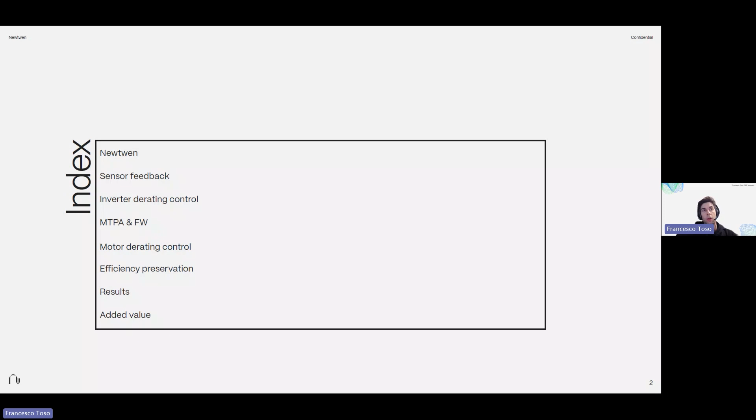So let's start. Newtwen is a software company working at the forefront of physics AI software sensor solutions. We have developed the first engineering platform, named Twin Fabrica, which is meant to create and deploy virtual thermal sensors at scale. Basically, we have integrated a streamlined 6-step unified methodology where you can import your geometry, set your material properties, import your finite element simulation analysis, make multi-physics simulations, and get your ROM, your reduced order model, thanks to the model order reduction libraries integrated in this software.

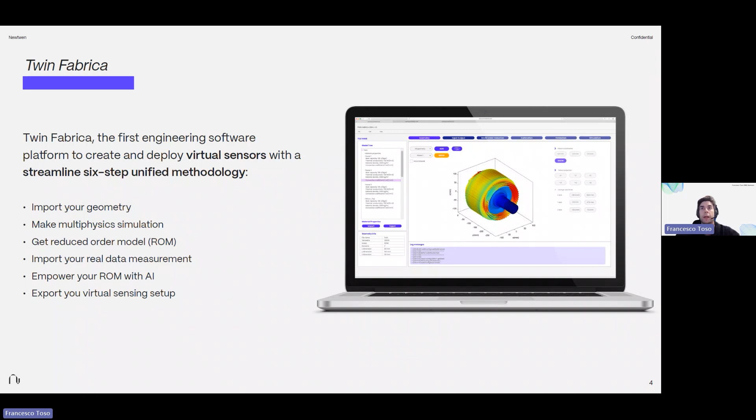You can import your real data coming from the field or from the entire engineering process of your electric motor production, your software, or your traction inverter, etc. And then you can also empower your reduced order model with AI in order to improve the accuracy and the reliability of your system, such that once you are satisfied with your requirements for production, you can export the final firmware to be plug and played inside your software architecture.

As I mentioned, I will not focus today on how to create, deploy, and validate virtual thermal sensors, but more on how to use them and extract value from them. The first comparison that we are going to analyze together is the kind of sensor feedback with respect to the state of the art of hardware.

Today in electric drive applications, when you have to control your electric machine and your traction inverter, you basically have at your disposal two main temperatures. One is the temperature in the stator winding, when you're lucky enough that you can place the sensors, because, for example, if it is not easy or if it jeopardizes the speed of installation in production, this kind of sensor is in some cases placed in the stator iron.

The other main temperature is the one provided by the supplier of the power module that you're integrating in your traction inverter. So you have the temperature near the semiconductor junction, but it's not an accurate state-of-the-art sensor feedback for giving you the right information on the junction temperature.

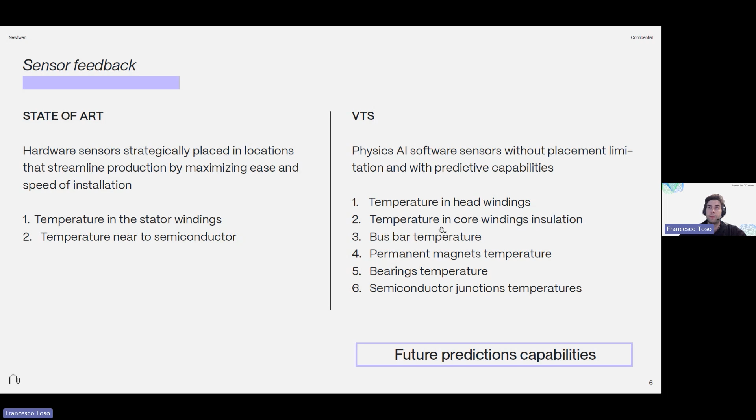The last advanced functionality that you have is the granularity.

So basically, in the state of the art, you have at your disposal a thermocouple or an NTC in the electric machine or traction inverter, which is giving you the information of the temperature in one point. But we know that for high current density applications, the gradient of temperature, of course, is not uniform, and the temperature in a single point is not enough to identify the hotspot.

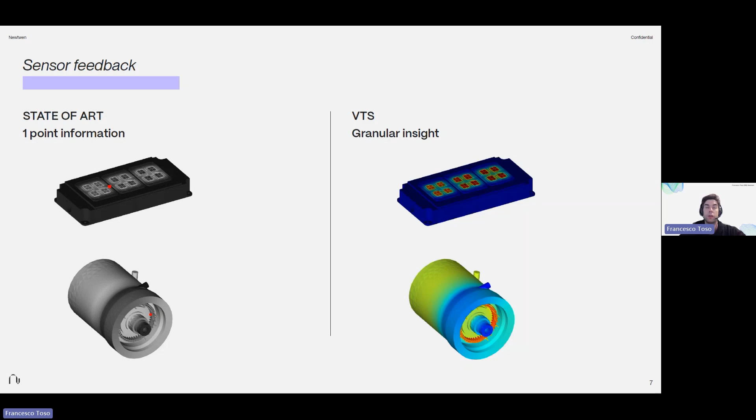So on the contrary, on the right-hand side, we have the virtual thermal sensor functionality, where you can exploit the granular insight information, like having an IR camera running in real time in your microcontroller unit, which is calculating which is the hotspot, the hottest surface in your system, and you can use that kind of information in closed loop control.

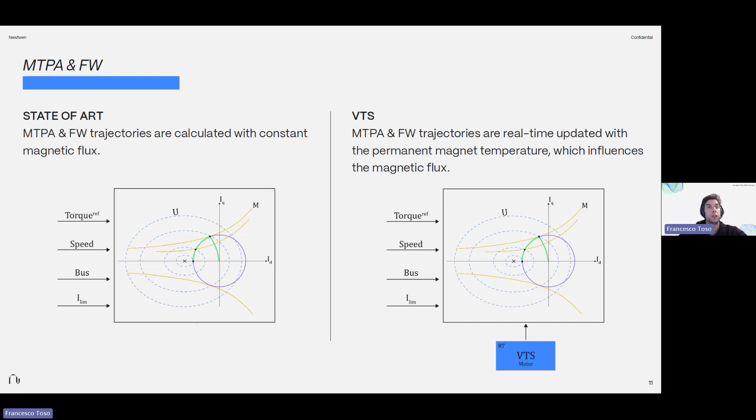So with virtual thermal sensing technology, instead, you can place a specific virtual sensor, a real-time VTS, that is estimating in real time not the hot spot in this case, but the volume average temperature of the permanent magnet. And so you can use this to calculate in real time the dynamic change of the magnetic flux, which can be used to optimize the real trajectory of MTPA and field weakening in your control. What does it mean? It means that you can enhance the efficiency of your electric drives.

So to move on with the third control derating strategy, the one regarding the motor, here we have two main bottlenecks in the electrical machines. One is on the insulation winding.

It's well known that statistically the main cause of fault for electrical machines is the degradation of the insulation winding. So it's a quite critical temperature. You want to be sure that you can monitor the temperature of your insulation winding below a certain level that defines the insulation class of your electrical machine. And so basically to do that, you use a simple PI controller, which is derating the current.

And in the case of the state of the art, since you know that a single point of measurement doesn't match the hotspot in your real system, you're applying a safety margin, in this case of 20 Celsius degrees. So even if the insulation class of the material that you have chosen during the design phase can support staying continuously at 180 Celsius degrees without jeopardizing the lifetime of your electrical machine, here you're applying a 20 Celsius degree safety margin, so you're limiting the temperature measured with your NTC or thermocouple to 160, acting on the derating of the current itself.

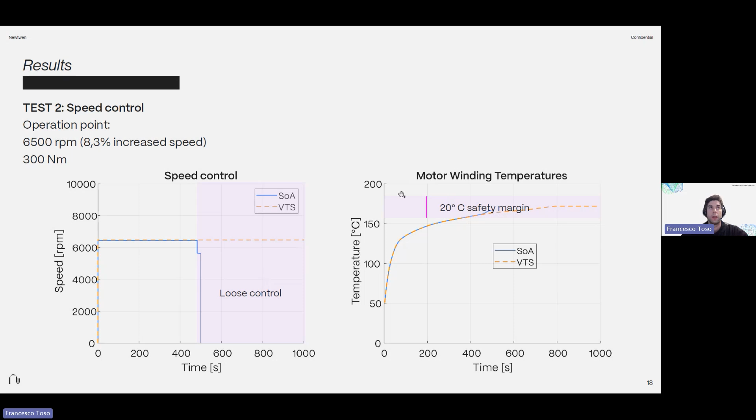So in this case, using VTS control, basically you can hold the speed continuously without any problem with this 300 Newton meter. And that was the effect on the motor winding temperature if you reduce this 20 Celsius degree safety margin. Now, let's focus more on the peak torque duration test.

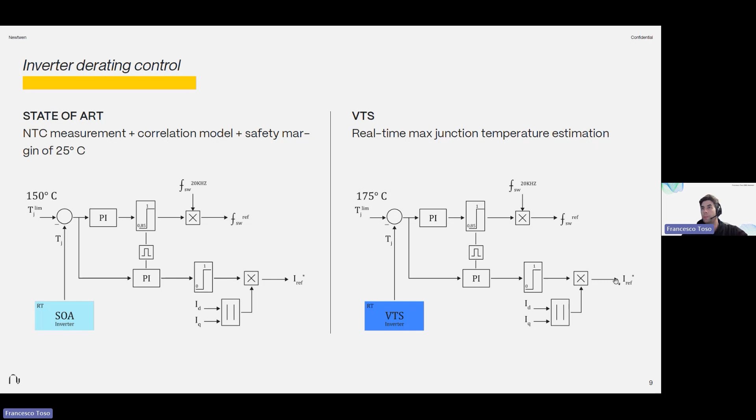So in this case, that 25 Celsius degree of safety margin really is compromising the performance of the peak torque duration, because without that, lowering that, you can have a 5-time increase of this peak torque duration. And it is quite an important KPI for acceleration performance, mostly for applications like motorsport.

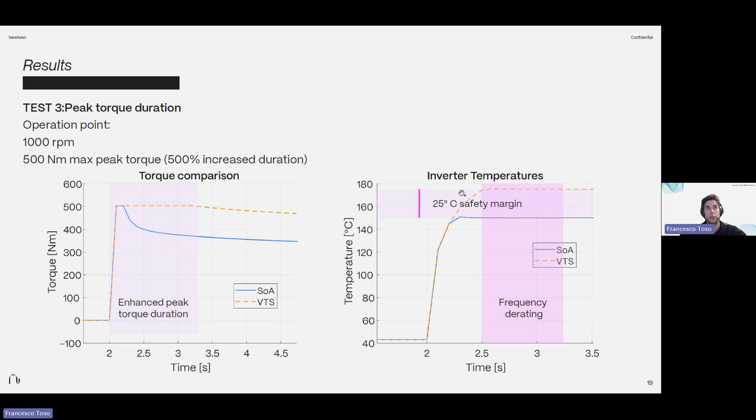And then once we reach the 180 in the motor winding temperature, of course, there will be the second control loop that is acting on the current, and so it's limiting the torque, basically, because current and torque are proportional one to each other, until you reach the steady state. So you can control safely to 180 and 175 the motor winding and the die of the junction of the inverter. Here we can see a clear effect in the max torque and also in the nominal torque.

And this second one, the 16%, when everything is steady state, you don't have variation on temperature because it is controlled to its limit of 180 in the insulation. You don't have variation on the torque, you don't have variation of the speed, so everything is in steady state. In this case, we have an increase of 16% in the nominal torque. So this is true, but it's true for this operating point. It's not true for the entire operating speed range of the system.

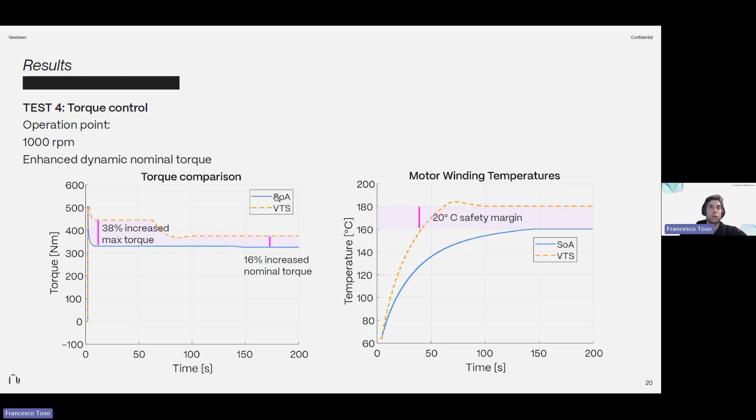That will be explored and analyzed in a moment. We will see together a full simulation exploring the full range of speed, such that we can appreciate the two areas defined by the torque with the state-of-the-art or with virtual thermal sensing technology.

Before that, we have the last test done here that was quite important to highlight how important it is to monitor the temperature in the magnet. So basically in the on-off application where you don't have a priori information on the mission profile, you don't have mission profiles that are already determined, so you don't know basically anything about the thermal behavior of the rotor. You don't know, when you turn on your system again, what will be the rotor temperature, so the magnet temperature. It's fundamental to have a virtual thermal sensor there that you can use in order to control if you want to avoid the demagnetization.

Here it is clear how motor magnet temperature and motor winding temperature have different dynamics in this case. So even if your winding temperature has cooled down, it's not said that your magnet temperature has cooled down enough such that you can restart with your operating condition. And this is the case. So without knowing this, your control is completely blind. And even if you're using the safety margin, you can't avoid this irreversible demagnetization. And so you can't avoid the loss of efficiency.

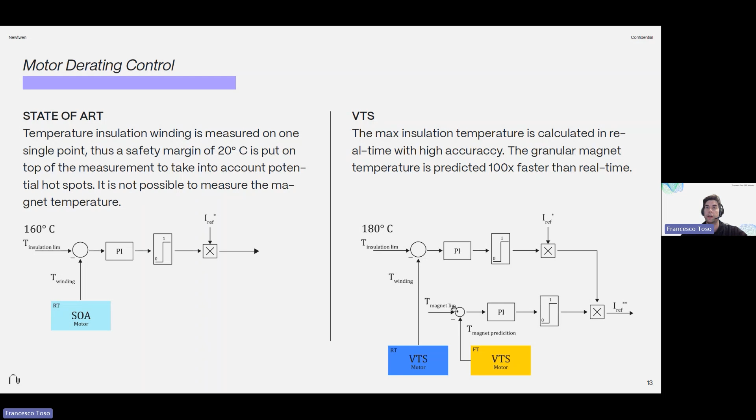Instead, if you use this second control loop, so if you can predict the temperature 100 times faster than real time in your magnet, you have the chance to calculate which will be the current reference such that in steady state you can control the system to a safety limit, in this case the operating limit, if you remember, was 100 Celsius degrees. And this is exactly what is happening here.

After the estimation of the virtual thermal sensor in real time, it's getting closer to 100 Celsius degrees. That control loop is acting and calculating super fast which will be the current level such that in steady state, and here you can see the first transient, you can control the temperature in the magnet below the 100 Celsius degrees.

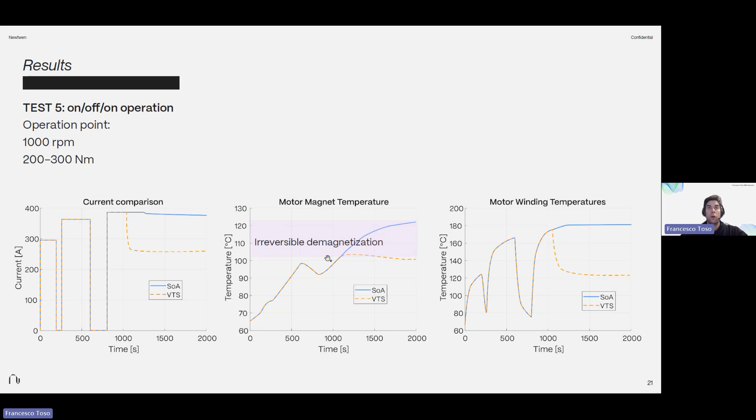So basically, to recap which kind of added value you can enable thanks to the virtual sensing technology, you can basically increase the rated speed of your electric drives.

Of course, these numbers, once again, are calculated on a specific case, on a specific operating condition, and in the best case where we are lowering the safety margin to zero. That's not to say that you have to lower them to zero. Maybe you can lower them by 50% or 60%, and still you can have a very huge margin in the

increased performance. So basically, with the same identical hardware, you can have more performance if you use this kind of control, or with the same performance requirement, if you use this control, you can design cheaper, so a smaller electrical motor, or you can use cheaper, smaller power modules.

So just to recap, you can increase the rated speed of your electric drives. You can extend the peak torque duration. The max torque and nominal torque also can be increased. But most importantly, as I always define, you can increase the state of function. So basically, you can maximize the performance of your system, but in a safe way, without jeopardizing the lifetime, the remaining useful life of your electric motors. And this is done thanks to the fact that you can also control magnet temperature, avoiding the demagnetization effect.

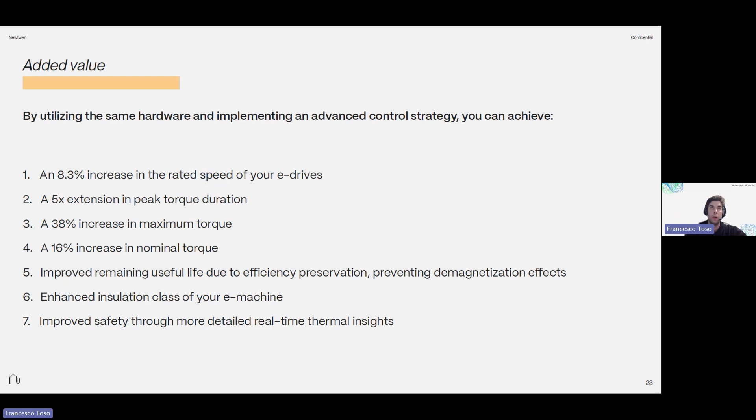So now we can see together, before the Q&A session, a full simulation done on Simulink, which in the meanwhile I also run. So here we have state-of-the-art control and virtual thermal sensor control. We can look inside here. To perform this simulation, we are using two digital twins: one of the electrical motors, where the electromagnetic and thermal behavior is executed in real time, and the other one of the power modules.

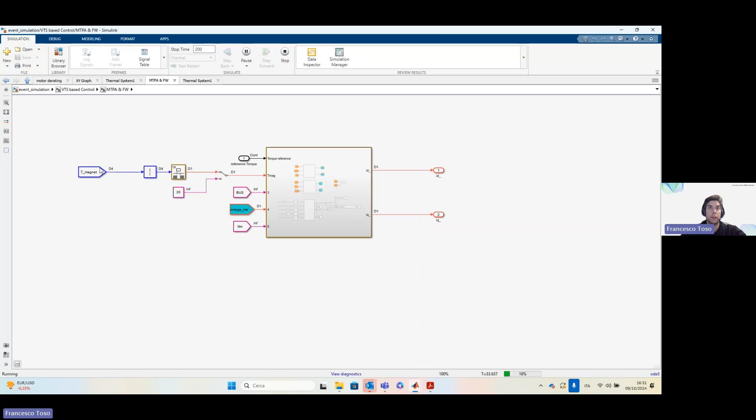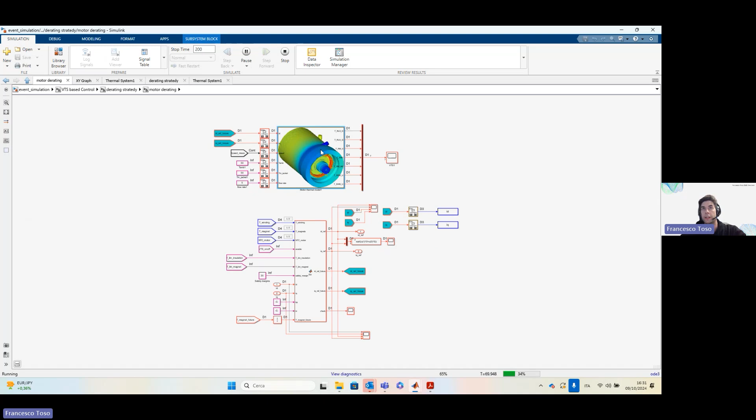And here in these three blocks, you have the MTPA and field weakening trajectories, which in this case are using the volume average magnet temperature of the electric motor. We have the derating strategies. First, acting with the inverter derating, which has a higher priority with respect to the motor derating, and then this reference is fed as input into the motor derating, which in this case is using, as you can see here, a model faster than real time in order to also control the magnet temperature. And here in this block, we have a current control that is following the reference and calculating the duty cycles for the traction inverter.

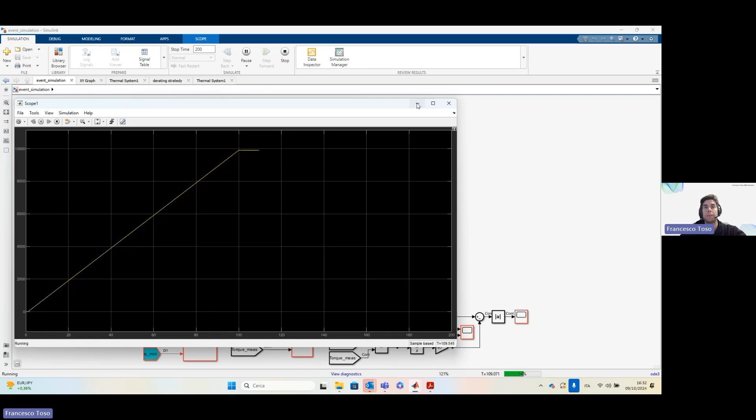Now we can see here we are asking for a certain ramp of speed from 0 to its maximum limit. So now it has just achieved the maximum operational speed limit for the system. And we can see together the two electric drives running in parallel with the same models, but with different control strategy architectures and with different operational limits for the safety margins.

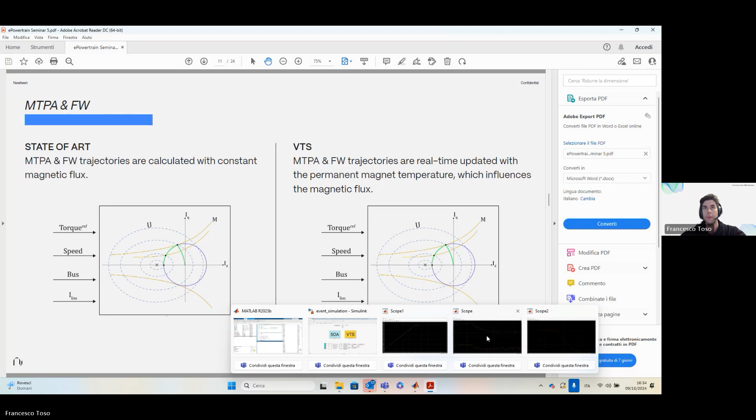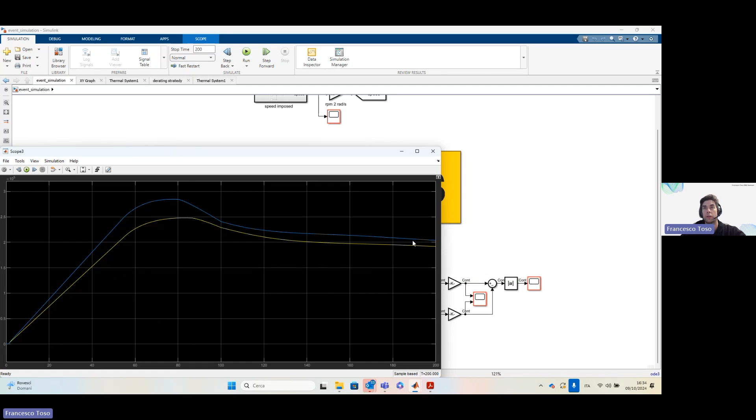And then, of course, here we are in steady state. Here we are on MTPA until more or less 60 seconds, when you have the field weakening, and you can see the area of the orange torque here is much larger than the area of the blue one, which is the state of the art. This can also be seen by multiplying the torque by the speed, so you can see the effect on the power. If you integrate, you also have the energy.

And if you also see the difference, you have how many kWh you can increase using VTS technology with respect to the state of the art in 200 seconds. So regarding the temperatures, let's see if they are all satisfied.

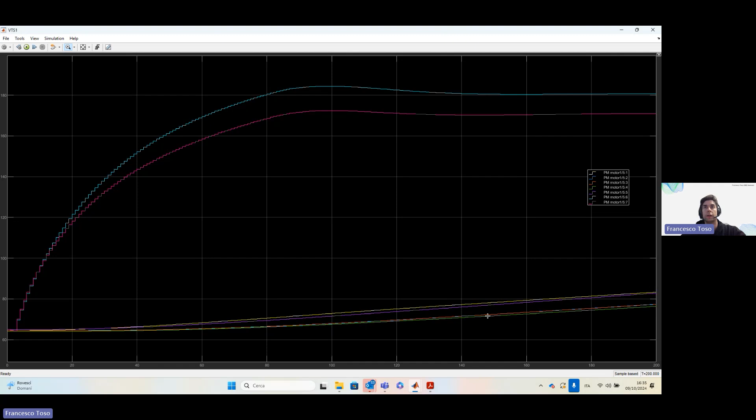So here you can also observe the sensors, the virtual sensors in the end winding and in the rotor temperatures. So basically, here it's clear how you can control the highest winding temperature to 180 Celsius degrees. You can also see the clear effect of the cooling, so inlet and outlet. So basically the pink, the red line here is the end winding where the coolant is entering the machine, as can be observed here.

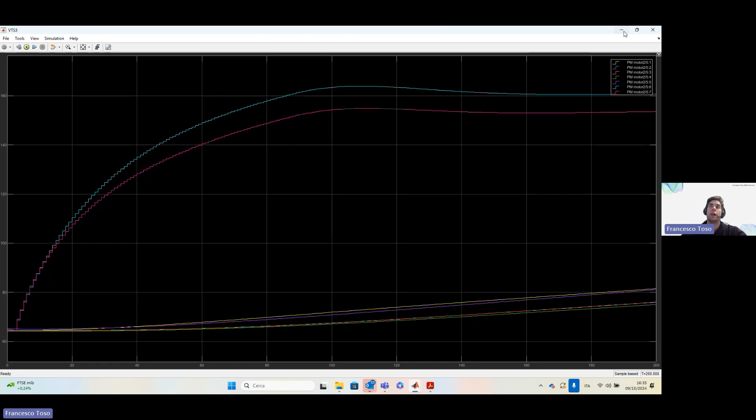We have the same also in the other. But now, as you can observe, the temperature in the winding is controlled to 160 and not anymore to 180. So the safety margins that we have mentioned during the presentation. And then I would like also to see with you which is the effect of the inverter derating.

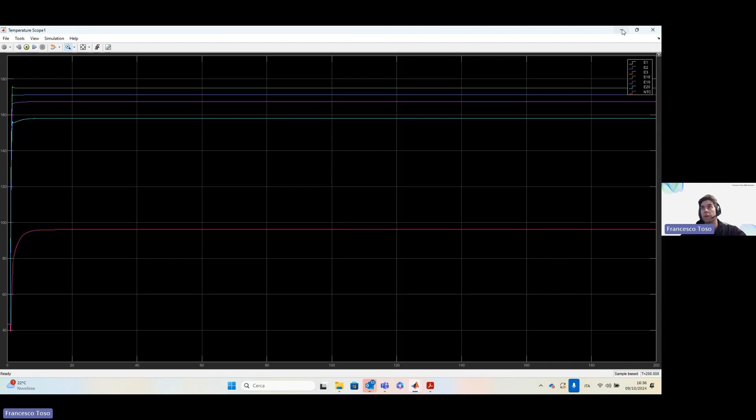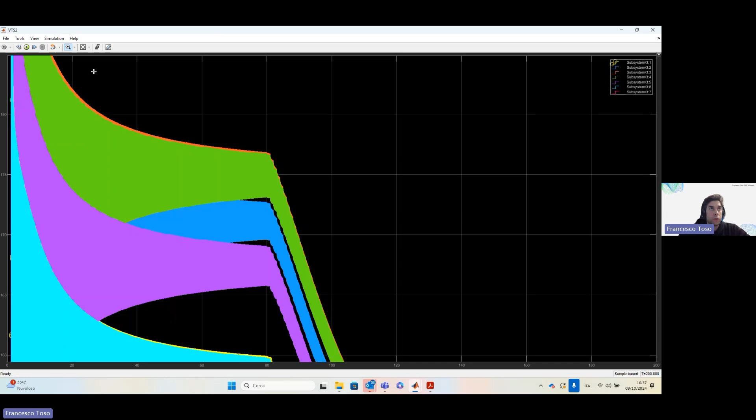This is not the real dynamic of the inverter. It is the main one, the fundamental one. So you don't see the swing on this model, but in the real traction inverter model coming from the digital twin, yes, you can see. So here you can see also the swing effect of the electric period of the current.

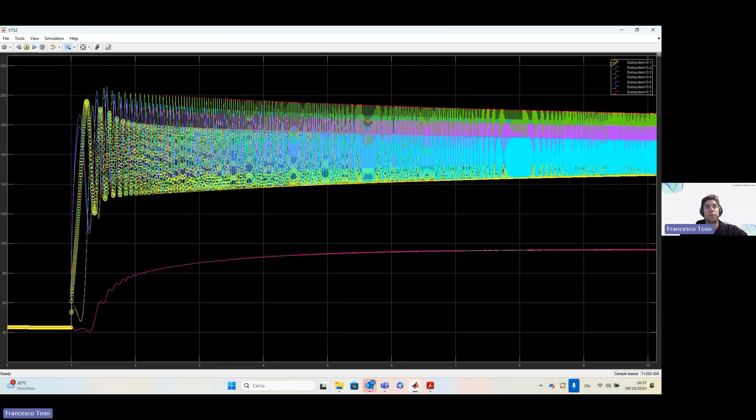In fact, at the very first instance, when the speed is very low, the frequency of the current is also very low, so the period is long, and that's the reason why the swing temperatures in the junction are more amplified, while with the speed increasing, of course, this kind of effect is not present anymore. And in fact, when you arrive more or less at the rated speed, you have the reduced swing temperature.

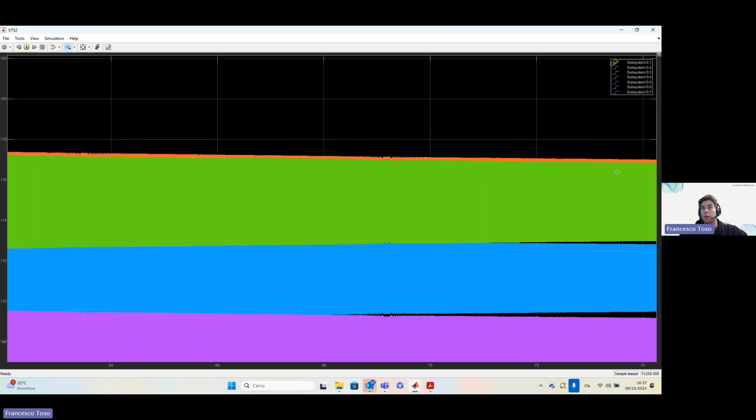So in this case, we are not using this kind of feedback in our control, even if, as you can see with the digital twin, it can be appreciated. But we are not using it because it's much more difficult to control this kind of oscillation instead of having the fundamental dynamic of the traction inverter to be controlled.

So basically, this is almost all. Hopefully it was clear enough. I know that there was a lot of information, but remember, you will have the full material, so all the presentation and also the recording. Now we have time to try to review some of your questions and I'll do my best to answer them.

Okay, just 1 second.

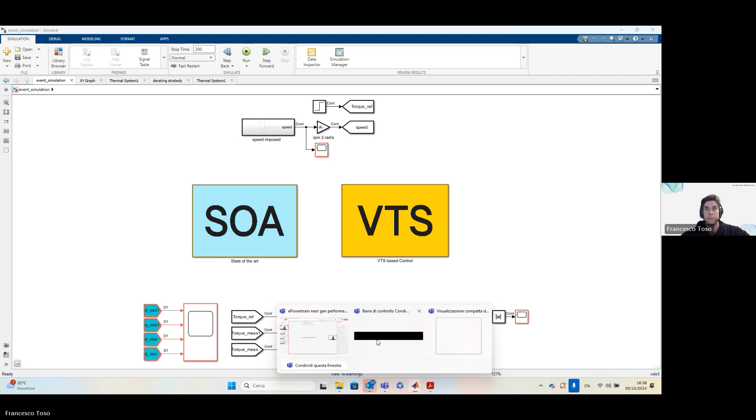Okay, so a virtual sensor has not only the added value to estimate the temperature in otherwise unreachable points, but also to predict this temperature much faster than real time. Okay, would this be available? Okay, basically to answer this question, the virtual thermal sensor in the end is a model. So it's a state space model.

We will have a deep dive session in the next chapter of our webinars, where we will see together how to create a virtual thermal sensor from scratch. So from the very beginning, from high fidelity models until the final firmware to be implemented in the microcontroller, where usually the real sensors are read, and so where the virtual sensors are executed.

But yes, since it is a model, you can predict the future horizon simply by changing the integration time step of this state space model. So if you play on the integration time step of the state space model defining the virtual thermal sensor, and on which task of the microcontroller you implement the virtual thermal sensor, and so where you are integrating the model, you can obtain the kind of horizon length that you would like to use for your electric drives application.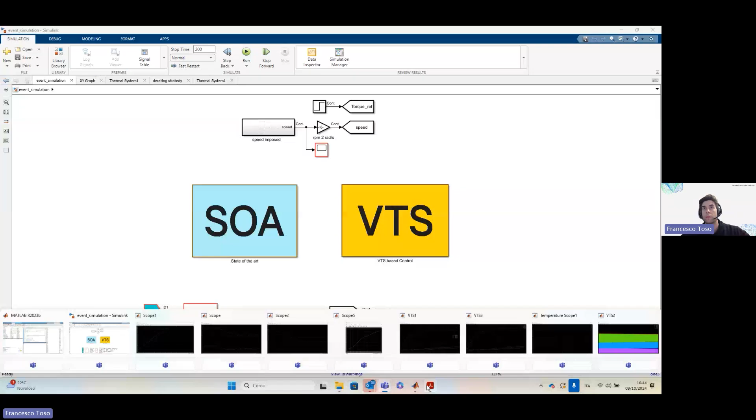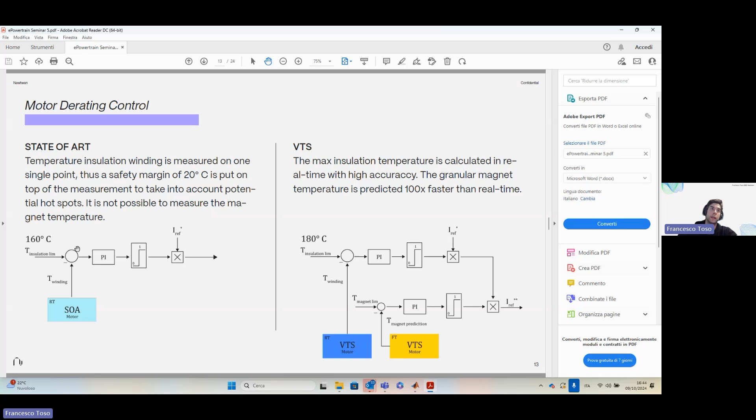So basically, if I go back to the presentation here, this control strategy is different because here you have a cascade of PI controllers in order to derate the current, which here in the state of the art you don't have. Okay, let's go on.

Okay, can the VTS method be used for safety relevant temperature measures? Very nice question. Of course. So the virtual thermal sensor can also be used on top of the main functional safety. The normative is not so clear. Of course, you can't remove the real sensor from the functional safety, but you can complement the real sensor measurement feedback with the virtual thermal sensor one in order to even improve the safety of your system.

How can you guarantee the accuracy of the virtual sensor based on partial data of the real motor or drive? Yeah, as I mentioned before, it is customer dependent. I mean, we don't choose the accuracy for the customer. It's the customer that sets its highest standard for accuracy.

So if you have a very good electric drive test bench and you can test your electric motor on full operating conditions, exploring all the speeds, all the torques, all the currents, different cooling conditions, different flow rates of the coolant, different temperatures of the coolant, and you're oversensing your electric motor or your power converter during the engineering phase, you really have the chance to validate and to measure the level of generalization and reliability of your virtual thermal sensor. So once you are satisfied with that and you are ready for production, you go into production, basically.